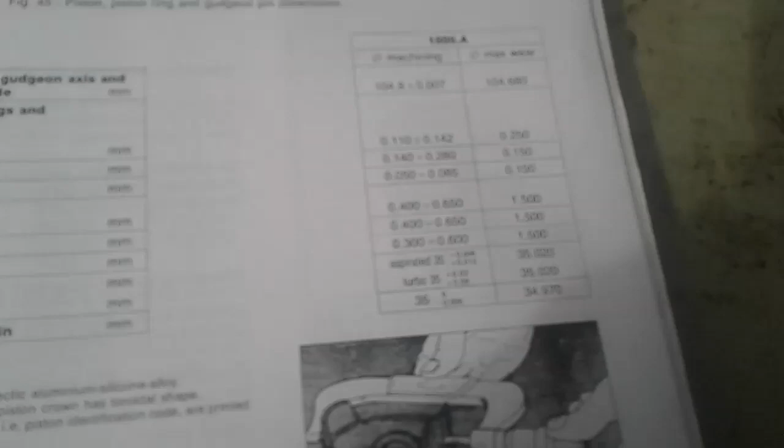Okay, we're working on piston rings again, if this thing will focus here. Maybe, maybe not.

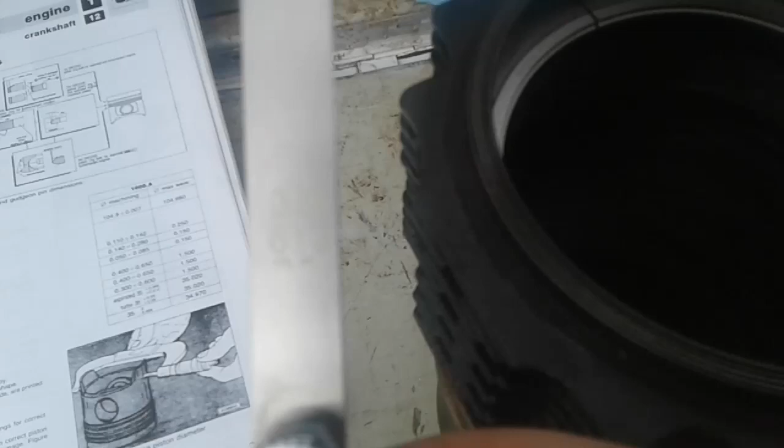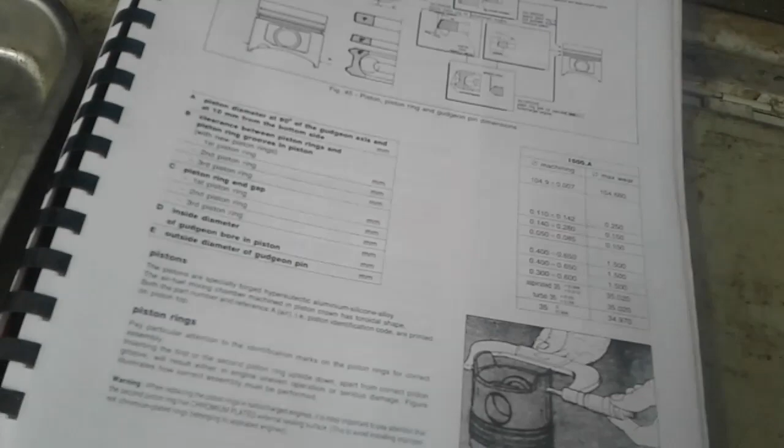These are our end gaps, come across, and the metric, whatever the mm is, millimeters, micrometers, who knows. So this is the correct feeler gauge for this. This is just snug. Wind's blowing real loud today. And this is 0.610, which is on the high side of our allowance there, but that's alright because this tractor gets run pretty hard, so it'll be real good for it. We're going to measure the other two and get them put on the piston after we take the other rings off, and we'll see how she goes.

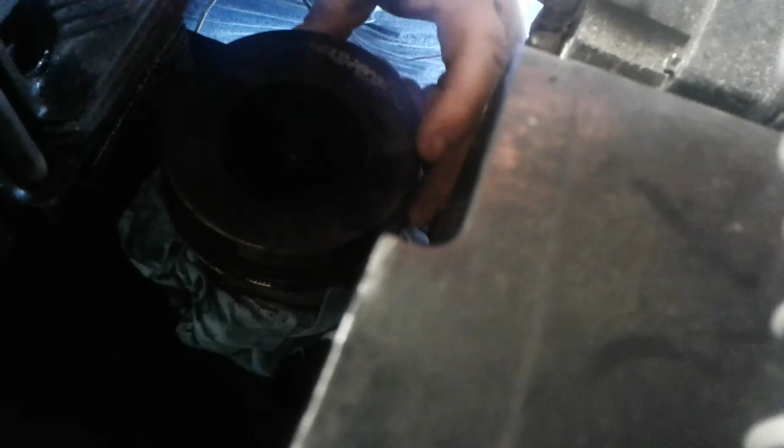I'm going to try to take these piston rings off without breaking them. I like to get a pick down underneath the ring on one side here, get it out of the groove, kind of work my way around without tearing up the piston too much. Maybe come back to the other side, open her up. Just work it right up off of there. One ring.

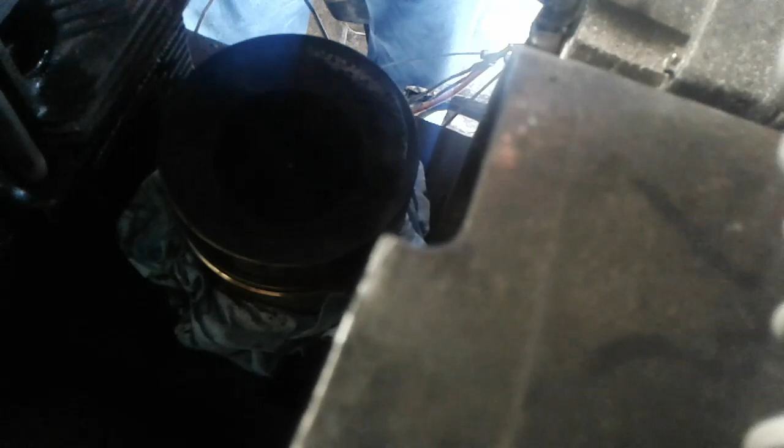And then the oil ring here on the bottom. They're normally pretty flexible, and you don't have to get the pick in there. Slip it off of there and make sure to get the spring out. Towel this off a little bit.

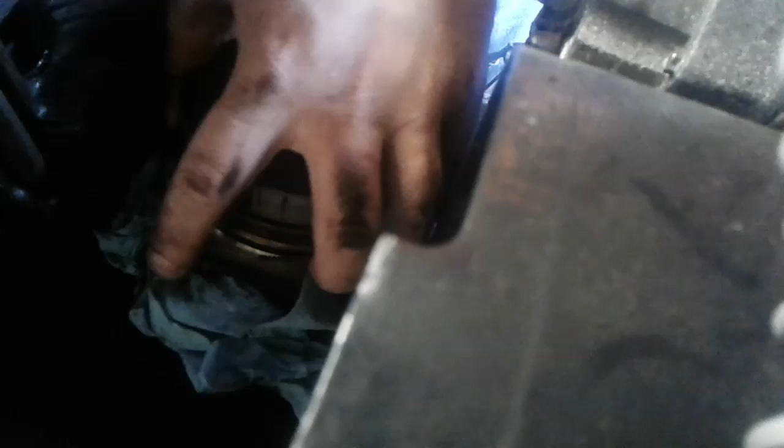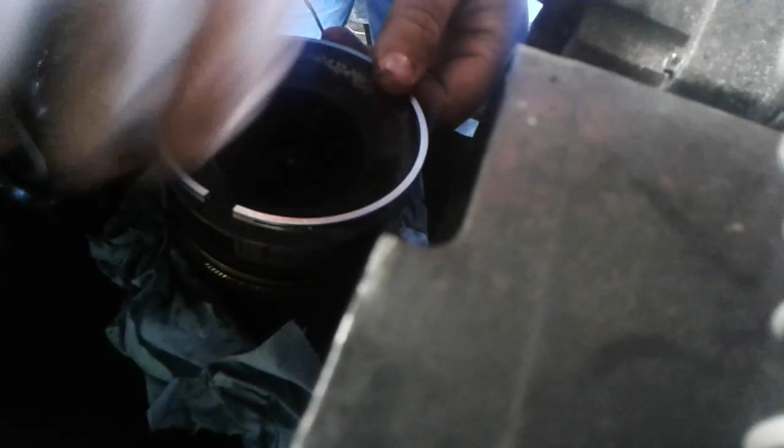New package of rings. I prefer to start with the bottom and work my way to the top, just because you don't get hung up on the bottom one. So I'm gonna go ahead and pull this spring out and put it on down around. And right there you can see where it's got a little metal band it sits in. We want to make sure that's pulled back together. Just take your time, be real gentle with these. Like I said, 3 rings just for this one cylinder is right at $105.

Got it in there. Make sure your spring is in the center all the way around. That one looks real good, and they're nice and free. Moves just like it ought to. I did make a mistake in previous videos. We did have a broken ring. This top compression ring was broken, so that's why we're putting rings in.

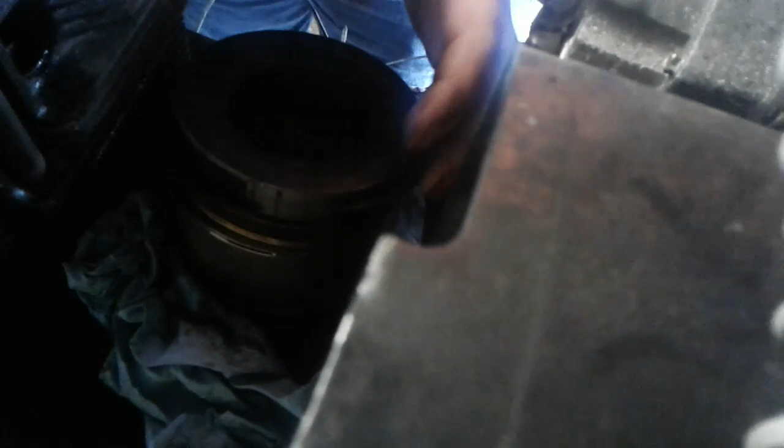Number 2, these have writing on them, it says top right here, so we gotta make sure that this side goes up. We already checked the end gap on these. I like to start at the back, get one corner down around, go back to the other side, get it down around. When you get to the first gap, you gotta be real careful, but I like to take a pick, try to hop that gap if I can. So that can give you some heartache if you get down in there. Get down around like that.

See, we're stuck in that first gap. I want to get down out of it. Probably gonna have to work the pick around it. Both these started. Nope. Like I said, you just got to take it slow and easy. It takes nothing at all to break these rings. And then you're stuck buying another $105 set of piston rings, which nobody really wants to do.

Wind's blowing like crazy.

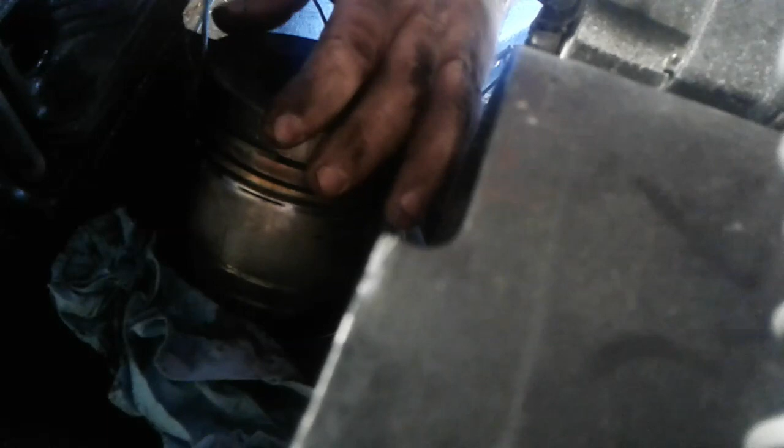Sorry if I'm blocking the camera. I'm not real great at doing this camera work.

This one here is normally the hardest one. This is your secondary compression or oil wiper or whatever you want to call it. The bottom ring is what holds oil. That gap holds oil up into the piston. And that one moves good and free. It'll smash down to be a perfect ring gap for us. We got both those in there. Get this top ring put in.

And again, we got it labeled top right here. I'll make sure that goes up. Like to start at the back, ease one side over and then the other. Just work her down on there. They do make piston ring openers. They're kind of dangerous to use, you can get too much torque on them and explode that ring right apart. If you take your time this way, I've had a lot of good luck. We got that one on there. Cool.

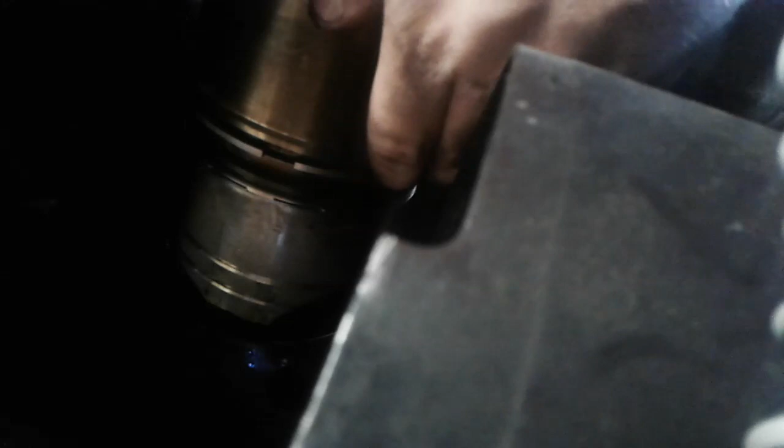Okay, we got the jug up here, lubed up. Now this is the super duper fun part. Take your time, get this thing to go together without breaking any rings. So I go and take this first ring, push it all the way forward. We're going to go ahead and squeeze this dude. There's a nice chamfer on the bottom of this jug, which really makes your life easy. So we got that one on there.

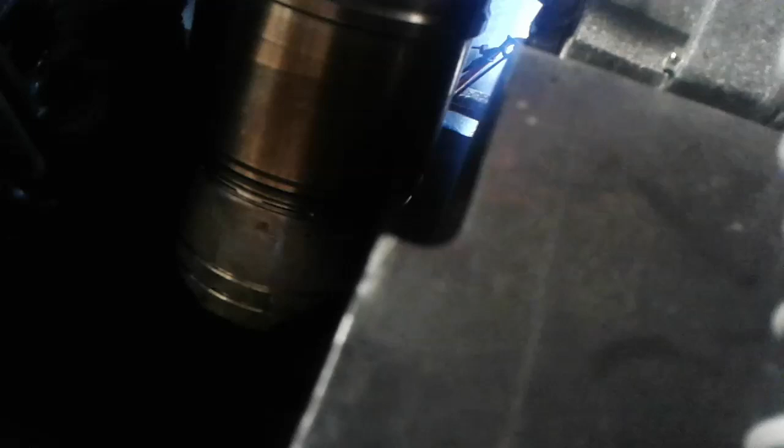I'm going to shoot some more WD down in here on the piston. Give us a little more of a fighting chance. Make sure we still have this where we want this piston ring. And find the end. Again, just take your time. Tear this thing up and you will not have a very good day. Take this around where I can see better.